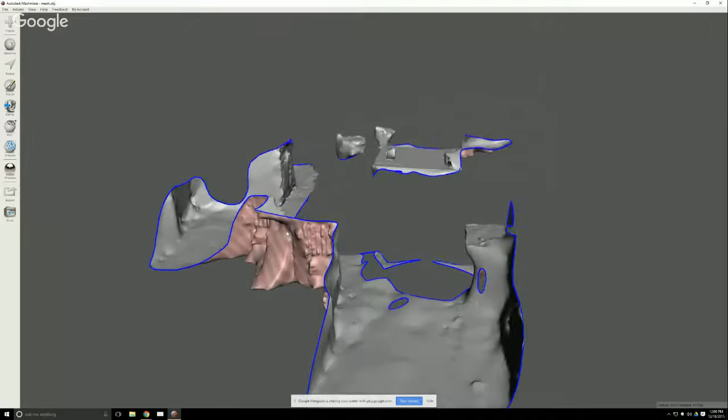So let me share my screen here. You'll see the webinar going into infinity, but I will bring up Meshmixer right here. And there we go. So this is Meshmixer. I'm going to go in and import a mesh. I think I used this one in the Udemy videos, but this is a scan I created with 123D Catch, which is essentially taking pictures with my cell phone, or any camera you happen to have, that will create a 3D model.

The mesh gets imported without any shaders right here, but if I click on shaders and drag the little world icon on, we'll see what this is. This is actually my kitchen. Chairs and tables. There's a window out over here looking outside, all this stuff. But what I wanted to get was right here in the center, which is a rock. So this is a rock from my garden that I wanted to scan.

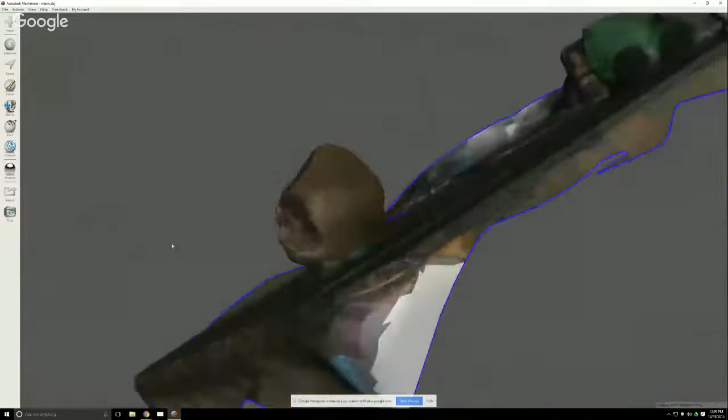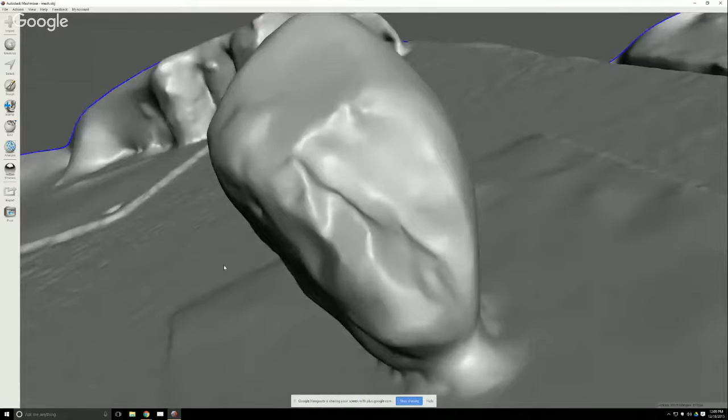If I turn on wireframe by hitting W, you can see that it's okay. It's actually not as detailed as you might think. If I turn the shader off to a normal shader, you can see that there's not that much detail on the rock. Certainly more than I could have created by myself, but not a terrible amount of detail. But it's all relative. If you wanted to model this rock by hand, it would be super difficult to get it accurate. So this is still a really good start.

If I hit W again and go back into wireframe, you can see that 123D Catch doesn't put a whole lot of triangles. Let me select some up here. It doesn't put a whole lot of detail in large flat areas, so up here the triangles are pretty large. But in places where there's a lot of curvature, like down here, there are a lot smaller triangles. The software says there's a little bit more detail there, so it spends more time making it accurate in these areas. That's why there's a difference.

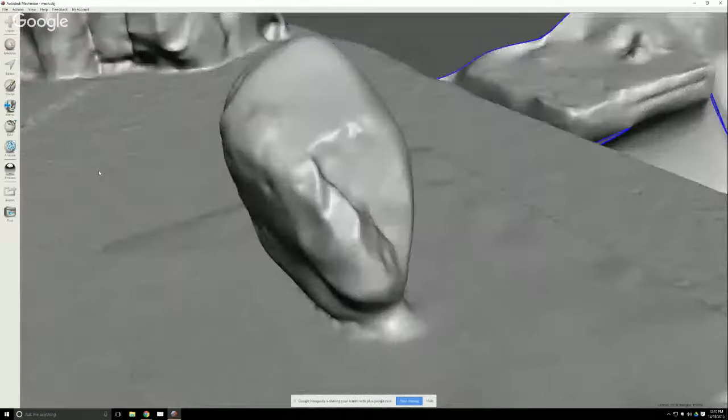Now, if we turn the shader back on by dragging the little world onto it, you can see that it looks really detailed with the color turned on. But that is kind of deceiving, because you might think there's a lot of information right here in the center where this little divot is, but if I turn wireframe on, there's a little bit of detail there, but not a whole lot, especially down here where you get all these patterns in the color, but the actual mesh doesn't have a lot of detail.

With that said, if you were to go 3D print this in color from an online service bureau, a lot of these colors would come out. They wouldn't be represented by geometry underneath, but the colors would come out. So that is a kind of a cool thing.

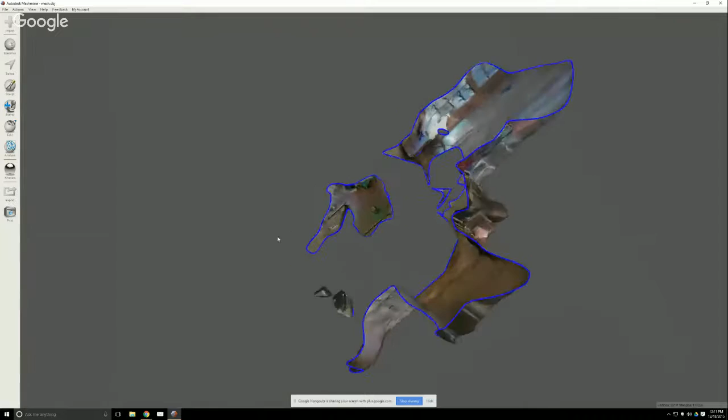So a basic scan cleanup - if I zoom out, you know, this is everything that was captured by 123D Catch, a lot of stuff that I don't want. So this is a very good example where I was able to go completely around an object. This is like a little cutting mat that I photographed this on. I was able to go completely around.

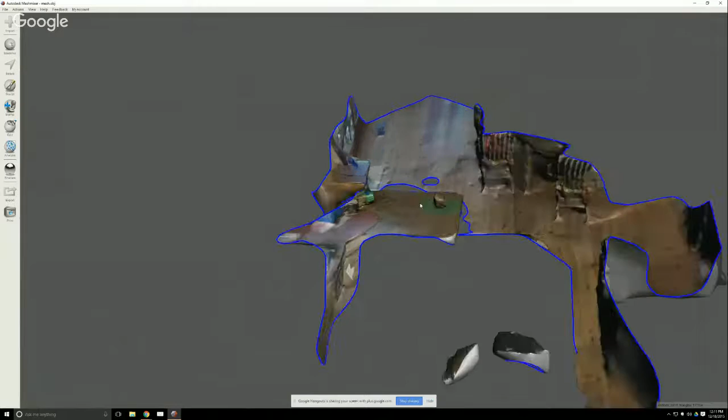Oh, and by the way, here's something that you use a lot. You know, if I try to zoom in on this rock, I'm not really zooming in on the right place. So then I might try to pan it over. That's great, and I zoom in. But when I start turning, I'm turning not at the right aspect.

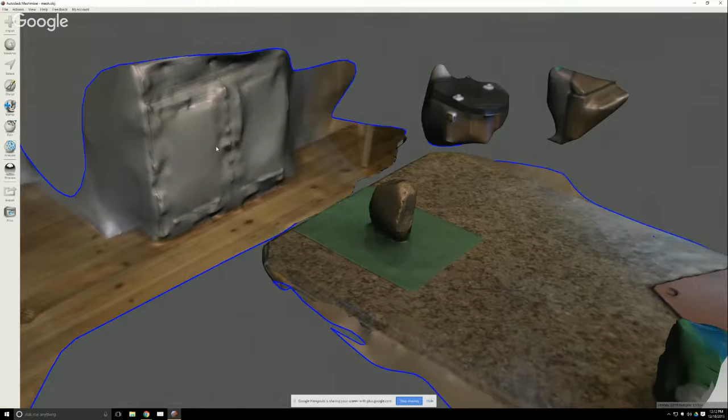So a shortcut that I use all the time is the C key, C for center. Wherever your mouse is, if you press the C key, your camera will be centered on that. So I'm centered on that cabinet here. If I happen to have the rock way at the corner of my screen and I press C, the rock now jumps to the center of the screen. So you end up using that a lot.

Even if you zoom in like this and you say, oh, I want to center on this area down here, you don't really have to move the mouse and go like this, because you're not really rotating around this divot right here, you're rotating around somewhere else. So you hit the C key and now you're rotating around that divot. It's terribly, terribly useful. Okay.

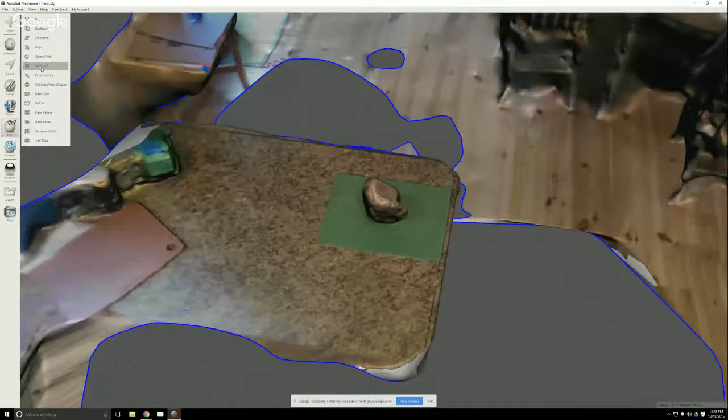So let me go back and say you really want to just get rid of a lot of stuff when you create a scan. The easiest way to do that is to go to Edit to Plane Cut. Plane Cut creates a plane that's going to be cut on, and you can manipulate that plane with these little handlebars here.

Let me zoom in a little bit. These little handlebars here rotate it in different ways like this, or move it with the arrows. Move it like this. And you can see with the arrows, when it gets shaded or ghostly, that's what's going to get cut away and the actual model stays.

But what's kind of easier for something like this, is even if you see the rock like this, you can just drag a line. So I'm going to click and drag a line right at the bottom of this rock. Boop - and it creates a plane right here.

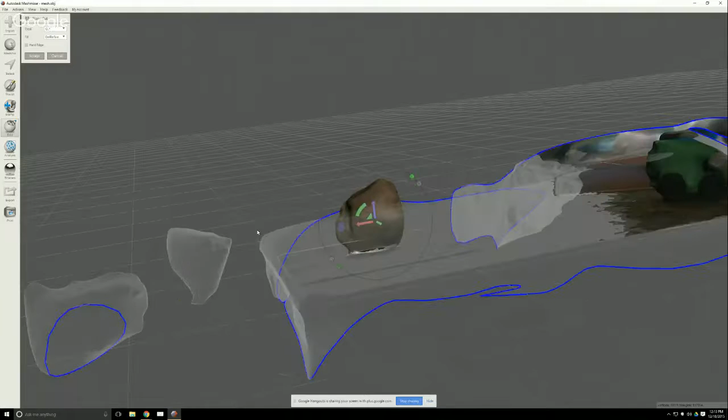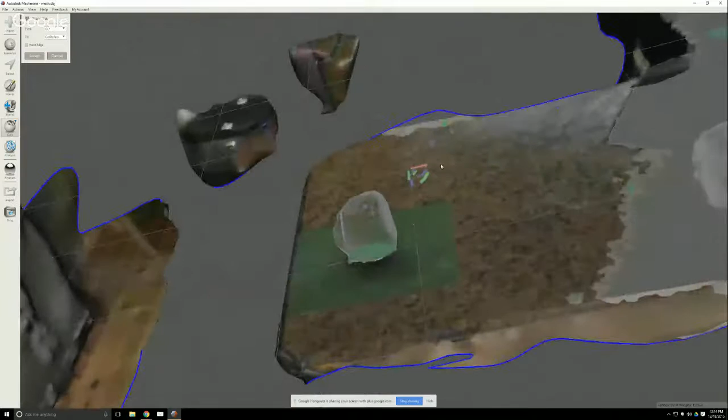Now, sometimes it might show up like this, and you say, hey, I dragged a line and it's not cutting the right thing, right? It's going to keep the counter and get rid of the rock. This little blue arrow pointing upwards changes the orientation, upwards and downwards. So now if I click on this, the rock gets deleted. If I click on this, everything else gets deleted. I'm going to click Accept.

So great, but that cut also left some other things here, right? It was great for the rock, but not perfect for all of the rest of the stuff. So that's actually very easily fixed.

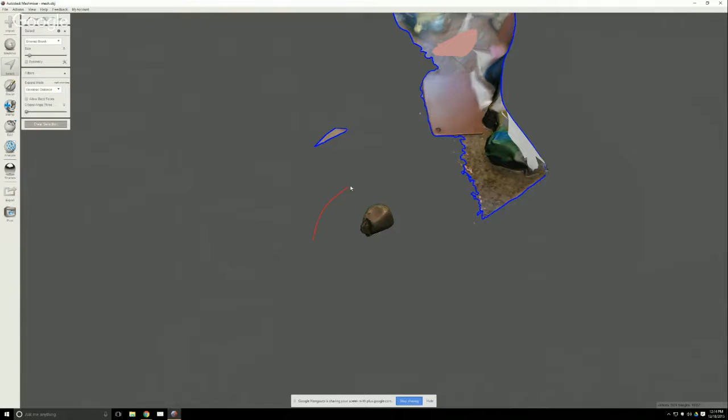I'm going to go up here to Select on the left-hand side, and this allows me to select - you see I'm selecting little things like this, but there's actually an easier way. I'm going to select and just kind of draw a line around the thing that I want. In this case it's selected it, but I don't want that to be selected, I want everything else because I want to delete it. So I can go up here to Modify, to Invert, or just press the I key.

And now everything except the rock is selected, and I can hit the Delete key. Boop - so now I only have the rock left. And the plane cut has created a nice cut on the bottom. And I could 3D print this.

Now, the question that was asked online was, how do I hollow things? Well, if you upload this to Sculpteo or Shapeways - specifically Sculpteo, I know this, but I think Shapeways does this as well - you can add in holes and it will hollow the model in the online program. You don't have to do it in Meshmixer. And the reason why you would want to hollow it is otherwise you would have to pay for all of that material that's inside that rock.

Sometimes that can get really expensive when you just want the outside. You just want it to look like a rock and not feel like one. Online tools like Sculpteo and Shapeways have options that say hollow and place holes in to make it hollow. But if you want to hollow this yourself, here is how you would do it.

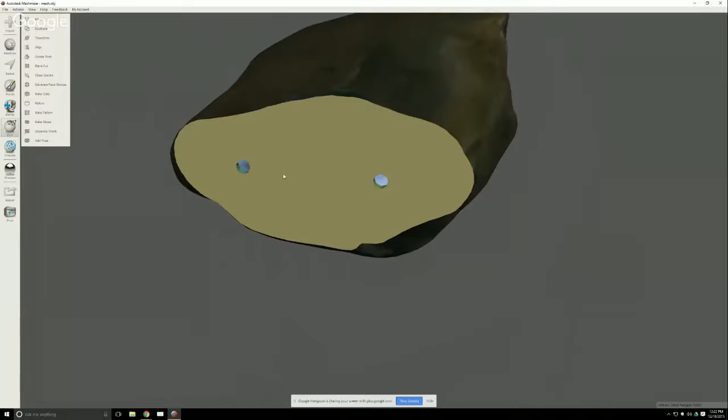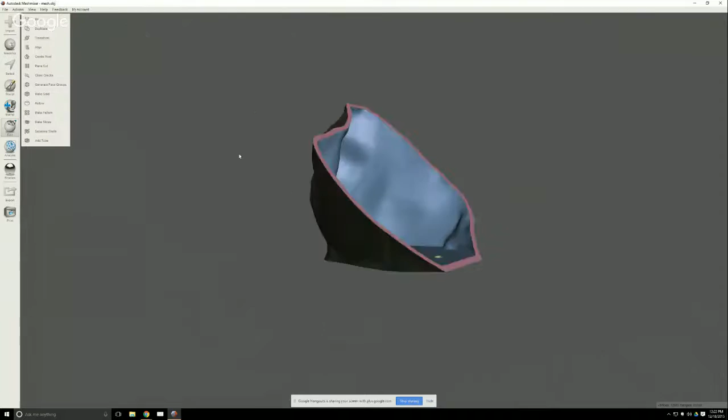Meshmixer will think about it for a second, and now we have a rock with some holes inside. If we click on this, we can see that there's stuff going on inside. I'm going to do something very egregious here and do another plane cut right across the top side of this, and accept it. You can see that we created 2 holes down here to an empty hollow, and that's what you would do.

You would upload, if I undo that, you would upload this into Shapeways or whatever and get it successfully printed. So that is how to do some scan cleanup.

Now people wanted to know about some measurement tools. There's some pretty cool things inside of Meshmixer under Analysis, under Measure, right here. So there's Type and Direction. Direction is absolute X, Y, Z. I don't tend to use this. I tend to use just the Normal, which is just based on the model itself.

This first one is interior thickness. If I click on this, let me turn off the shader for a moment and zoom in here. You can see there's a little red dot following me. As I click and hold my mouse button down, you can see on the right hand of the screen, 3.08449, and as I click around, this is 2.99863. So it's showing that the thickness from this skin to the next skin on the inside is pretty consistent with the thickness of the skin that I just created.

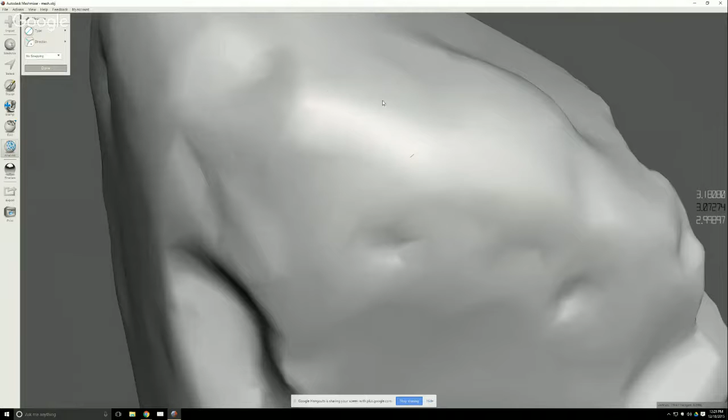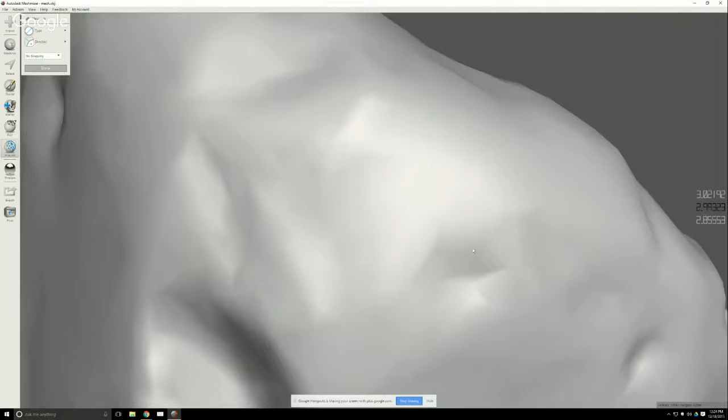This number right here at the top is the maximum number since I started dragging, and this is the minimum number since I started dragging. If you let go of your mouse and click again, those numbers will reset, but it helps to show you that in this area, let's go right here. If I click and drag and just scribble around and move the rock here, that area, based on where I scribbled around, variates between 3.02 millimeters and 2.85 millimeters. And right in the last place I clicked was 2.99. So it kind of helps you to determine thickness there.

A lot of other different measurement tools you can do that are really kind of awesome, actually, in different places all the way through your model, 145 millimeters, things like that.

Some very cool tools are distance. So it may not look like I'm doing anything, but if I hold down Control and click on one place, or Command on a Mac right here, and now I click on another place, I can get the distance between those 2 points through the model, which is pretty nice. So if I wanted to start my ray over here, I would have to hold down Command on the Mac or Control on the PC, click here, and now I can start dragging from other places. So that's some cool measurement tools there.

Let me go back here. So that's some questions on the measurement tools and scan cleanup. So hopefully that helped answer those survey questions there.

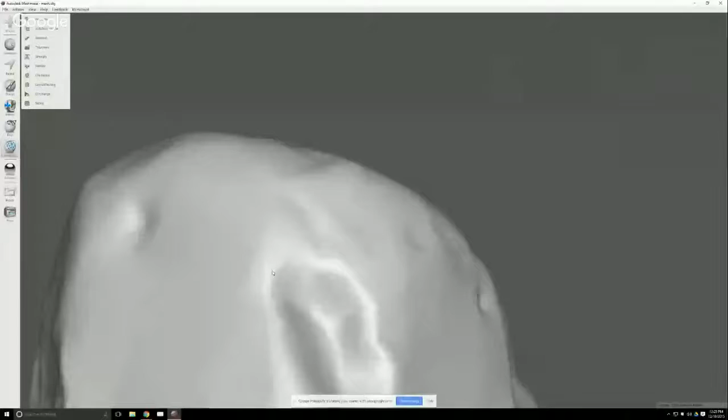So let me go back and share my screen here. Okay, so what I'm going to do is go back on my desktop here and import this. So this is just a plate that I created. It's not flat on the bottom, kind of bumpy on top. So that's great. Let's import another plate and append it. And oftentimes what people see is that things come in, especially with scans, not aligned. Let me move the browser over here. And the question is, how do we align these things together?

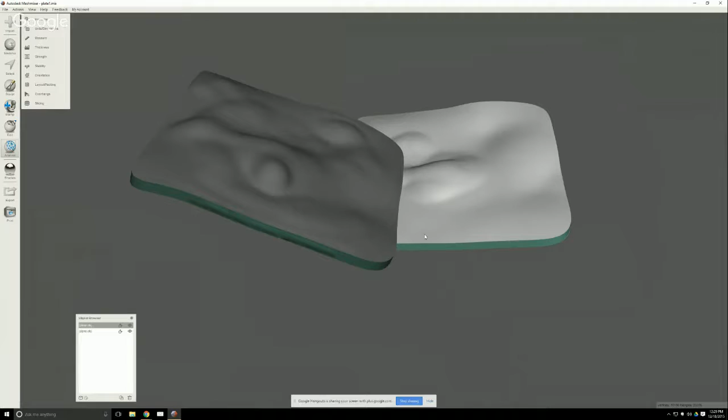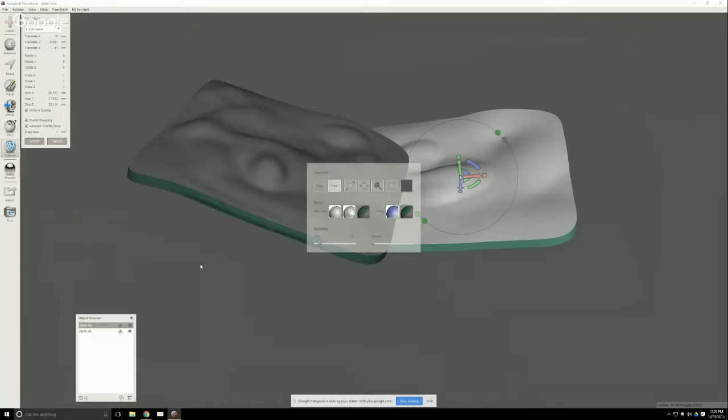Now, certainly you can do it by eye, right? A kind of more official way is hold down spacebar and turn on snapping. The little tip here is anything that is shaded is the thing that is enabled. So right now we want to make free not enabled. We don't want a free camera, and we do want to enable snapping like that. So what this does is it clicks into the different views, like click, now I'm looking directly from the top. If I click from the side, I see that this one on the left seems to be okay, pretty aligned like this, but this one isn't, right?

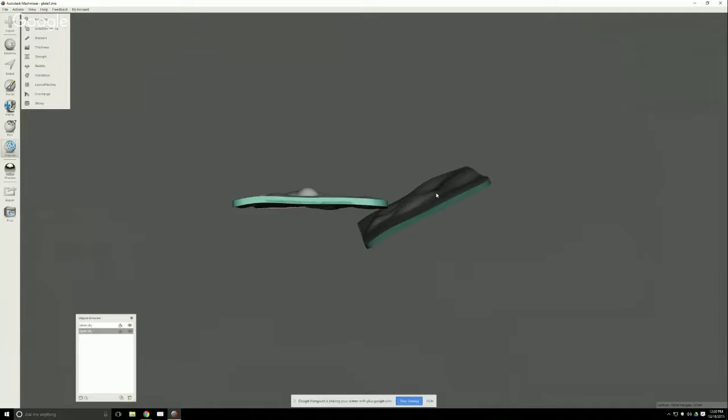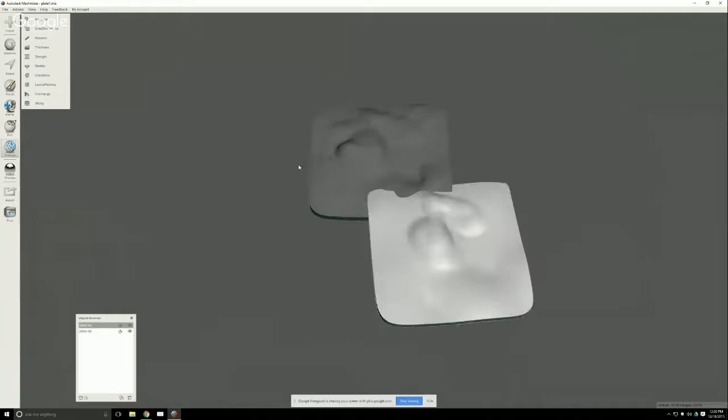So I'm going to click on this, hit T for transform, and try to align it as best I can, and click accept. Now we go and let it snap to the other orientation. Again, hit T and try to align it as best we can there. And then we're going to go upwards and snap like this and try to align as best we can here. And then hope that when we put it on here, it kind of matches.

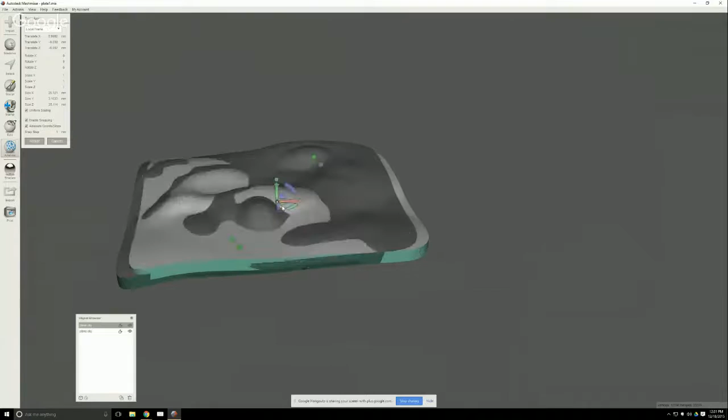But it didn't, right? So now we have to go back, move down, and we can see that these plates are really not aligned yet, right? So it creates a lot more work, and then you don't really know if they're that aligned. Still, it's not. So here's a different kind of way of doing this. So the trick for this is usually the things that you want to align have some common features on them.

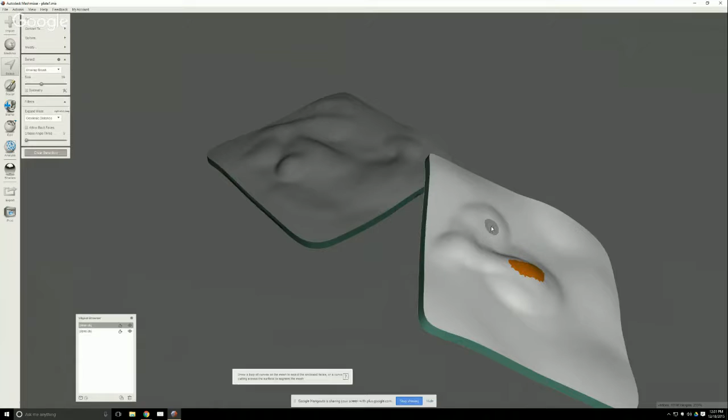So in this, let me do some selections. Make my select a little bit bigger here. I can see that this bump right here is common over here, maybe something right here, and maybe something right here. There's a whole bunch of other stuff going on this plate that's not aligned or not on the other plate, but those are something that is somewhat similar from plate to plate.

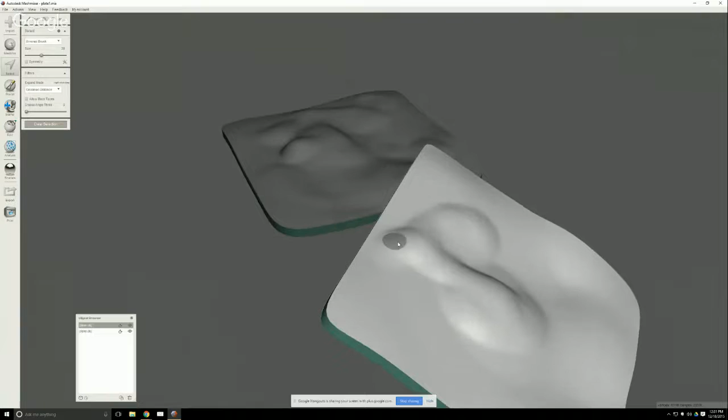So what I'm going to do is do this a little bit more methodically. I'm going to go in and say this ridge right here is something I can find on the other one. This is something I can find on the other one. And something like this I'm going to find on the other one. So I've created 3 selections. And I can turn the snapping off like this.

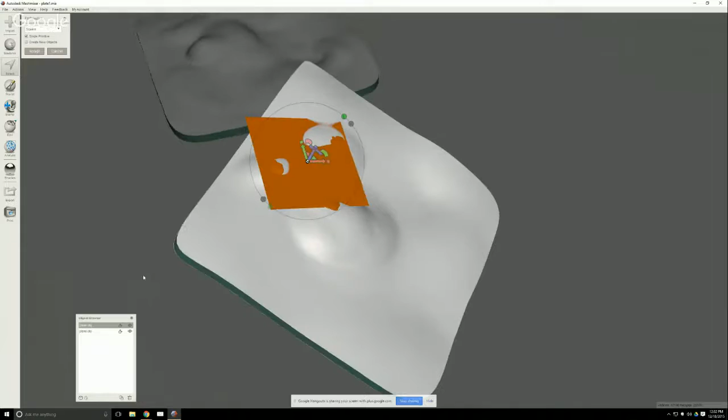And now with these 3, I'm going to go in to Edit, Fit Primitive. This is set to square right now, so I'm creating some little squares. But what I want to click is Single Primitive. Boom. So what it does is it averages all 3 of those selections and puts a flat square in between those 3, connecting those 3 places. So I click accept. So now we have this very, very flat square in here.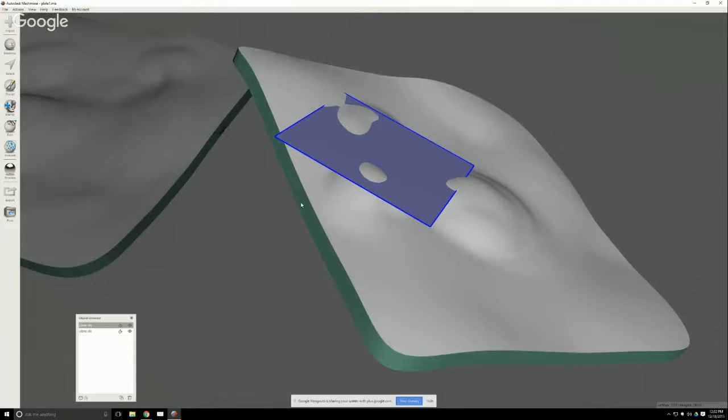So what we're going to do now is go to Edit, Align. And I'm going to make sure that I have surface point and then Y up. And you see that the thing went somewhere. I'm going to click on this plate, and you can see that the flat areas of this plate are not causing the object to flip. And you can see that the plate is under here. You can also say flip like this if you want the plate to be like this.

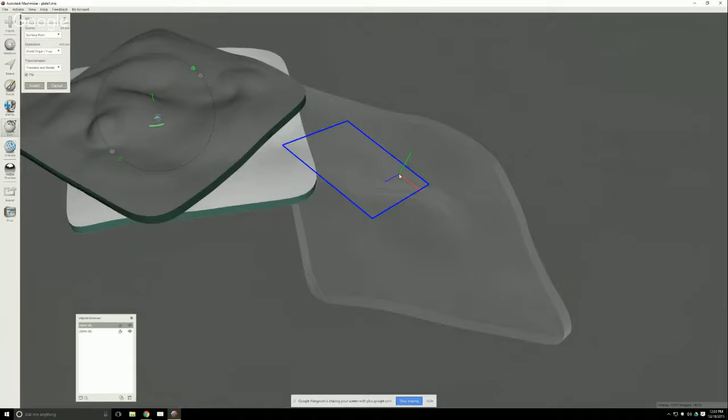But see, once I get over some little bumps that were poking up through that plate, that's not good. So I just try to choose one of the flat parts of that plate and click accept. So now let me move this guy away. So now this plate right here is aligned to the Y up. So this is facing directly upwards.

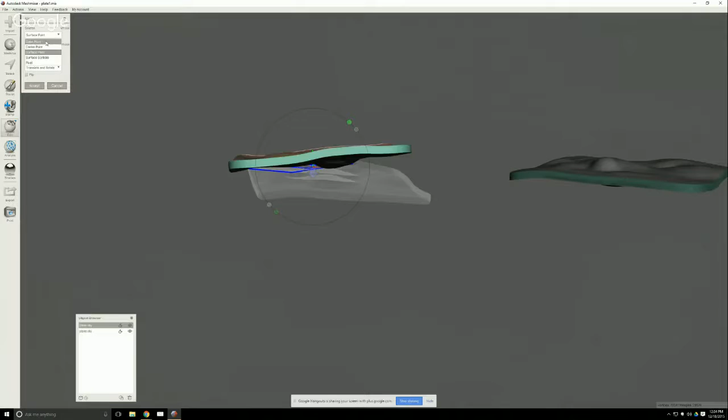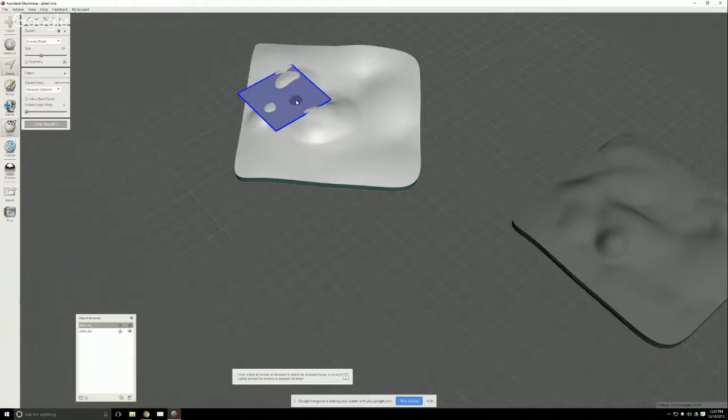I'm going to make sure this one is selected and do align again. And instead of surface point, I'm just going to say base point and just translate. So I don't want it to rotate. And so that now put this facing upwards and the base point, if we view grid, right on the grid like that. So that's great. At this point, for ease, since it's its own face group, I can double click on it and hit delete. So I've gotten rid of that plate.

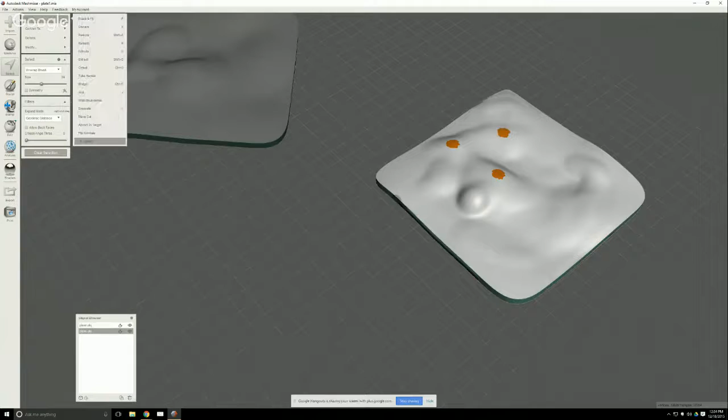So now I'm going to go over to the other object right here and try to select the same places. Now this won't be perfect, but it was generally right about here, generally around here, and generally right here. I'm going to do the same thing. Edit, Fit Primitive, Single Primitive. So we created a plate here. Click accept and Edit, Align.

Thomas just actually wrote in there. He says he has to sleep. It's 4 a.m. in his time. So I super appreciate Thomas's diligence for coming to this webinar. Thank you so much, Thomas, and have a good sleep.

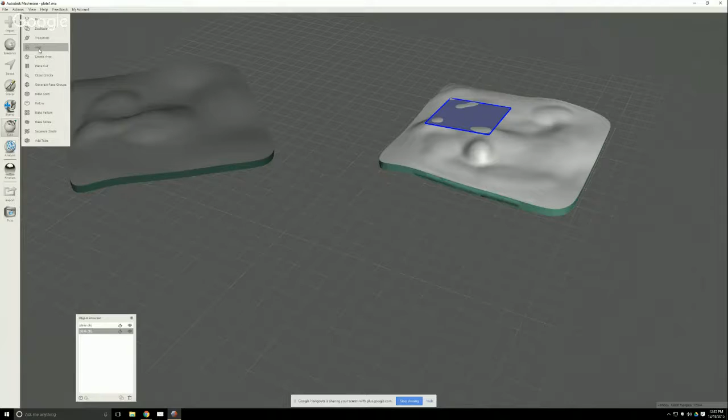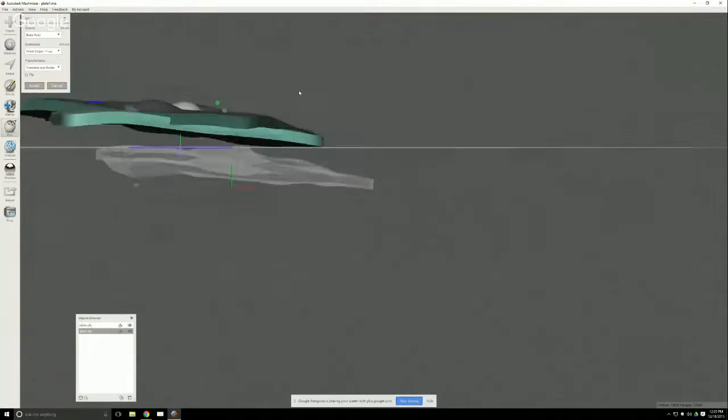So I'm going to align again with the surface point selected and flip again. And see, as I click on this, there's some alignment happening. So that's pretty good. And then align again and switch surface to base point. So these two planes are essentially at the same level. Now, assuming that I was pretty good at selecting those two places, I'm going to select that and delete it.

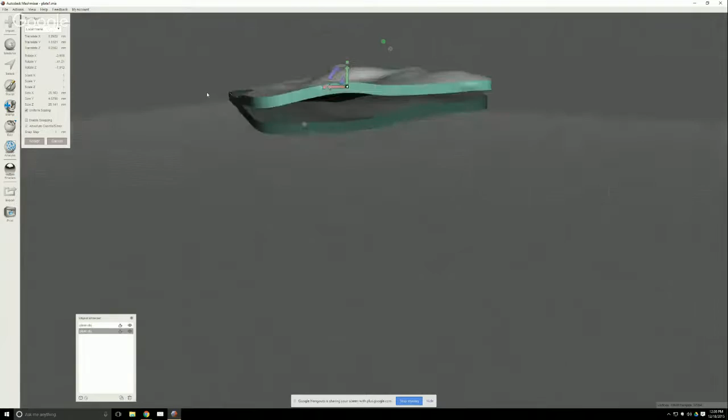So now all I will need to do is use the transform tool in one plane, right? This green plane right here, to go and move it. And you can see I was a little bit off in my selections right here, but I only have to use these easier alignment tools of the arrows to get it where I need to go. It looks like I was quite a bit off on these, but you can see that it's getting a lot closer than if I were to try to eyeball it.

So you can use these kind of helper planes to see the differences between these, and these plates were significantly changed right here. But it's actually a pretty cool technique to use those helper planes.

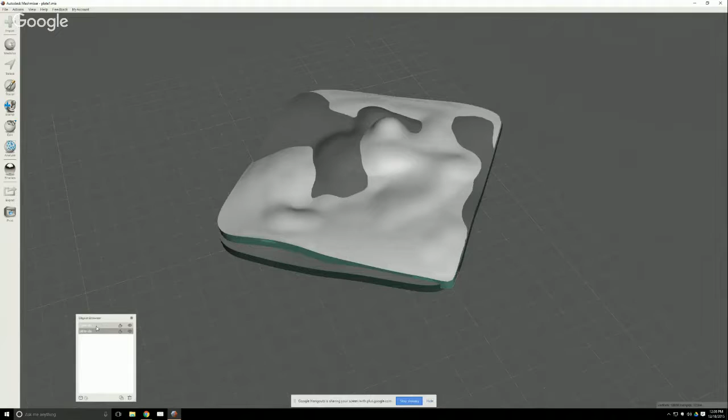And then once you have them aligned, you can use some of the measurement tools by selecting both of these and going into analysis here and doing things like deviation, where you can see how each one deviates from the other. And if you actually click on this bubble, you can select where it deviates, which is pretty cool. And it does depend on which order you click.

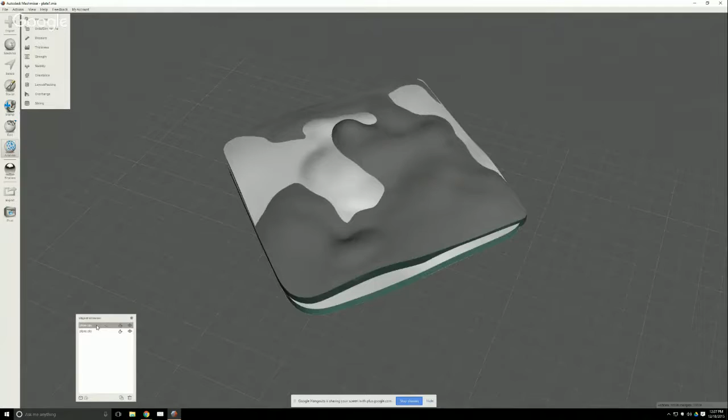If I click on this first object here, and then the second, and do deviation, it'll show the deviation between the first and the second in that order. Or if I click on the second one first and then the first one second and do deviation, it shows the opposite. So it does matter the order in which you click.

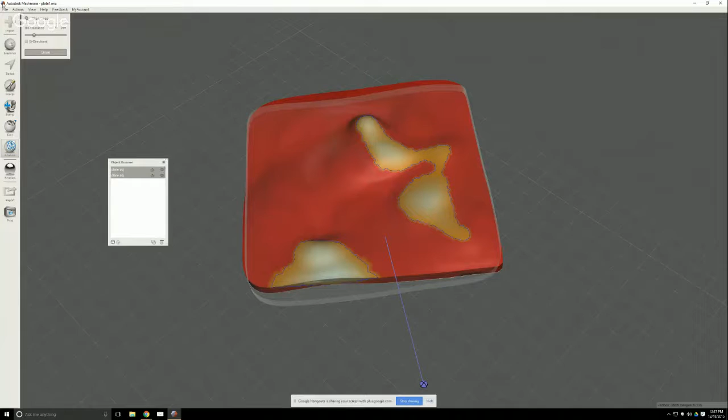And there are other tools too. The clearance tools, how much clearance you have between the two, that type of thing. A lot of cool things there. So that's how to do some kind of alignment type things inside of Meshmixer. Let me go back here so you can see me.

So using that helper plane is very nice, because when you use the fit primitive command, it creates a plane with its own face group. So it's very easy to go and select that plane. It doesn't Boolean it in. It doesn't mess up your mesh. It just kind of passes through your mesh, but it's tied to it. So as that plane rotates, your other object rotates as well.

As I said, it's actually quite an often request to do precise alignments. That will get better, I am absolutely sure of it. That's one way of doing it now, and it will get better in the future. Now, the last thing that I wanted to talk about of the things that I sent out in the email was not really with Meshmixer, but it does interface with it.

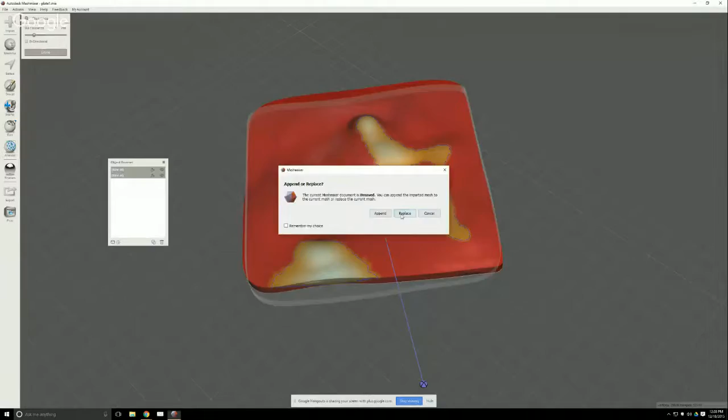If I go back into Meshmixer and just bring in the bunny, replace and fix the bunny here with the inspector like this. You know that Meshmixer creates overhangs. So we go here to analysis, generate supports, right? So very, very blocky supports.

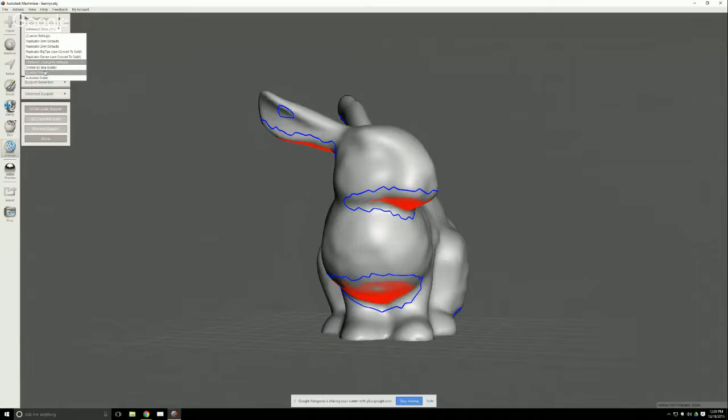These are supports for an FDM printer called an Ultimaker. These are supports for some sort of SLA printer, so a resin printer. Since these print upside down, let me do a free camera. You could essentially see that this prints upside down like this. So there's a huge amount of platform right here, and then it prints downwards like that. But it creates support structures.

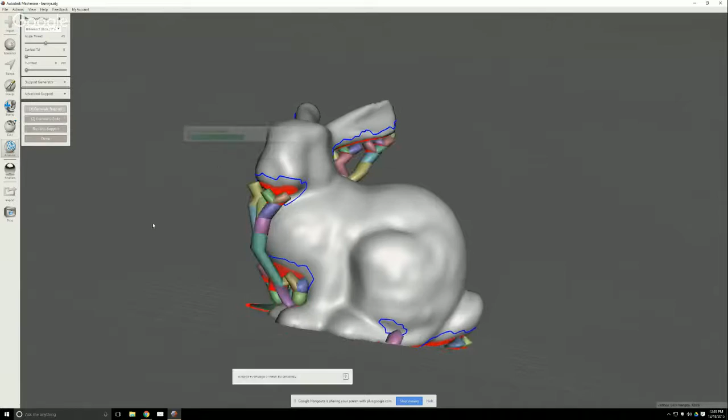And let me switch this back to Ultimaker, remove, generate. And when you're done with creating supports, you remember that you can edit supports inside of here. You go to convert to solid. You can create a new object or replace existing. I'll just replace existing. And now you have some models. If you hit wireframe, you can see that these are 3D models just like the bunny is.

And before I go into Print Studio, I want to tell you one other thing that I thought was really, really awesome. I'm going to go back out, back into overhangs. Now, a lot of people say, I want to generate support. Great, this created support, but I don't like this support, right? So they'll say, I want this support not to be attached to the foot of the bunny. I want it to be on the ground. Why isn't it doing that?

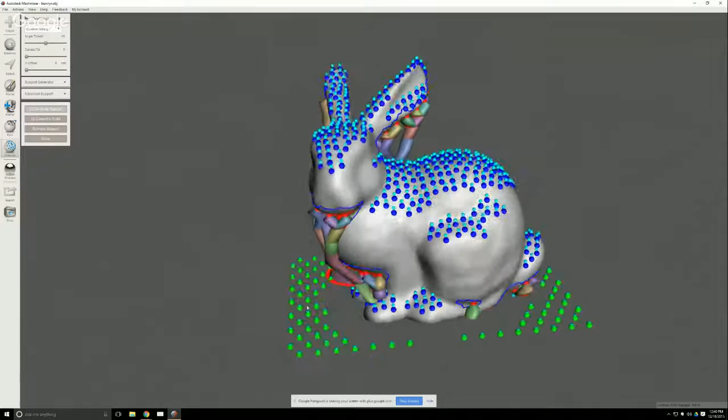Well, there's a couple of different things you can do that are completely hidden features inside of Meshmixer. If you press the D key, D as in David, or D for display, or D for debug, you get some really awesome effects. So this is kind of a hidden Meshmixer tool that shows you all of the places that Meshmixer thinks are valid for creating automated supports. So if there was some object up here, the entire back of the bunny would be fine for creating automated supports. But you see that down here, Meshmixer doesn't like this for some reason.

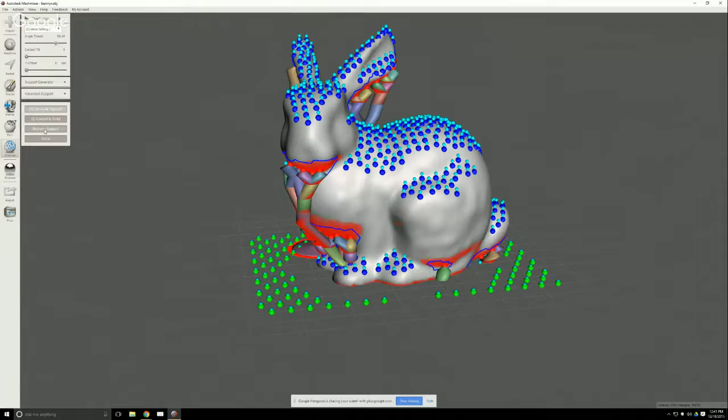If you change the settings, the automated support settings also change. You can see that when we create support, it will create them from these little blue dots right here, downwards, right? And the red is overhang dots, going down wherever they need to go.

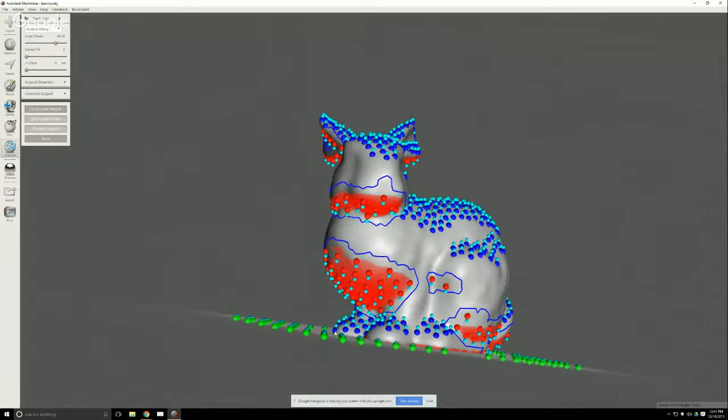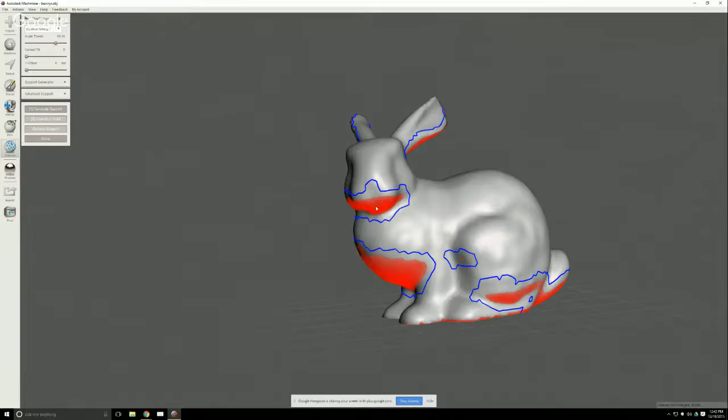Now, a lot of people say, okay, this is great. This helps me understand where Meshmixer wants to create support structures. But what if I want to create a support structure and Meshmixer doesn't let me, right? So right now I can drag down. There's something about this support that Meshmixer doesn't like. If I just click the mouse, I can start creating supports.

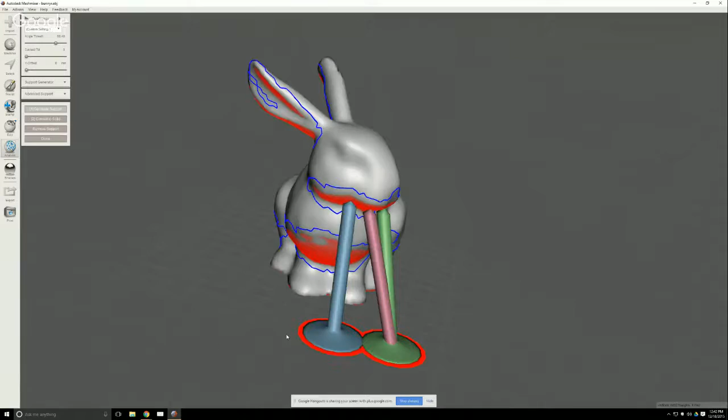But if I click here, you see Meshmixer doesn't let me. If I drag it down, Meshmixer doesn't let me for some reason. It violates one of the rules up here. So what if I want to say, I just want to create a support down, right? So the way that I did that is I held down the Shift button. So holding down the Shift button says, don't listen to any rules, just create the support wherever you as the user tell it. So if I go like this, I'm going to create a support.

But you have to be very careful when you use this, because you can see that that support carves through the bunny. So I could create a support like that that literally carves through the bunny. So you have to be very careful when you use the Shift key, because you can create supports that there's no way they could exist in real life.

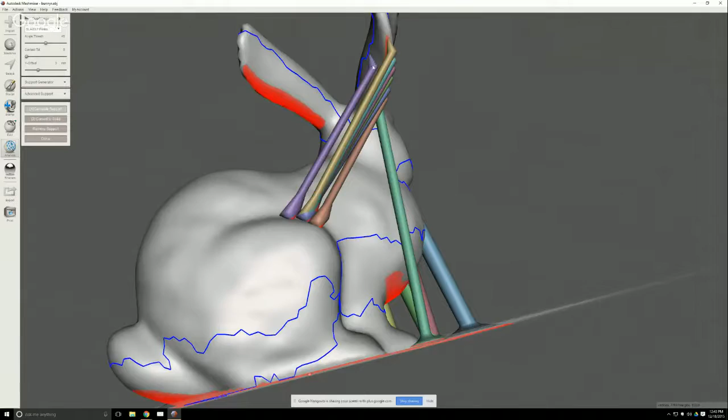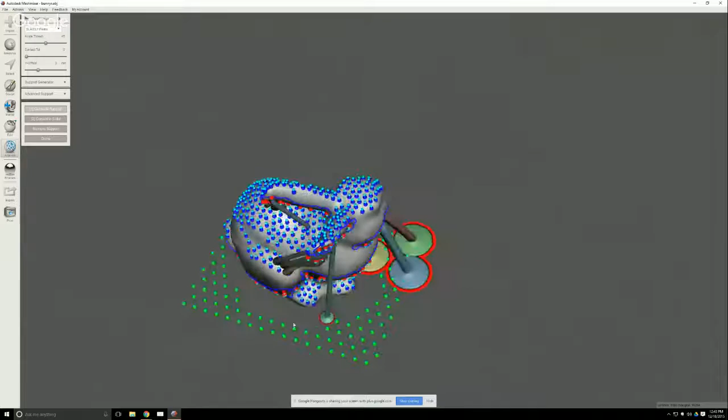So like that one's fine. I'm just clicking, clicking, clicking. Great, it's all working. But if I know that I want a support somewhere else, like right here, for example, I could try to kind of fudge it and have it go down, or I just hold down Shift and it will create it. But remember, it can mess up your model. So that Shift key is really, really cool. And the D key is kind of useful too, to show you where Meshmixer thinks that automated supports can go. So some people do ask about that.

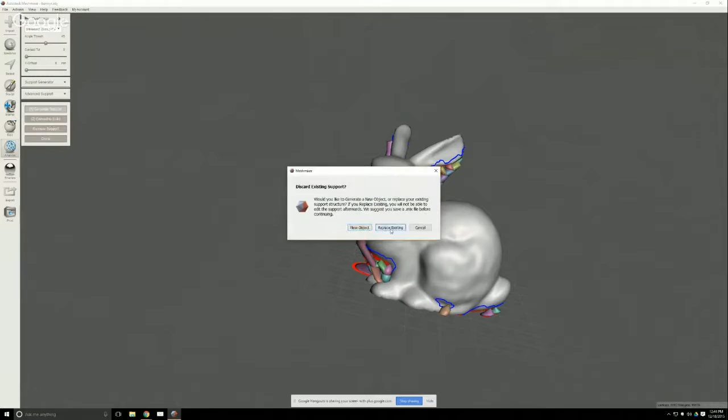And so people also say, great, I'm going to remove all of these. Let me go back into Meshmixer, generate support, turn off that. Convert to solid. So this is what I would export for printing. But then, sometimes, the printer wants more supports in a certain place or whatever. So this is great, but sometimes you just maybe want a little bit more, or your slicer might tell you something more. So let me go out.

Let me export this as bunny.stl on my desktop. My desktop right here, bunny, and bring up a slicer that I have called Simplify 3D. Right. So the bunny comes in here. I can say customize support structures. I believe this is at the same angle, and generate supports. And you see my slicer actually has some more supports that it suggests over and above what Meshmixer wanted. So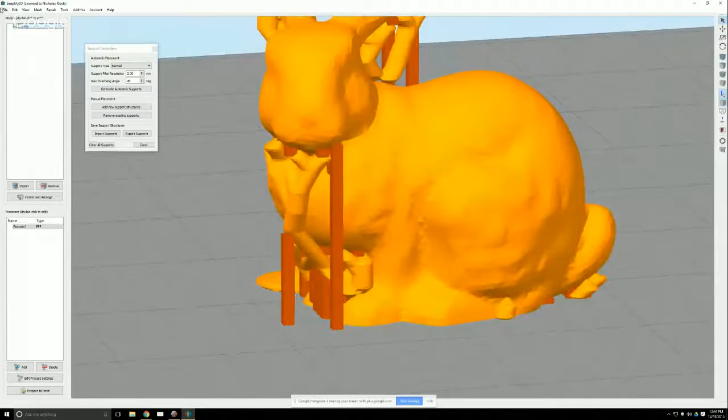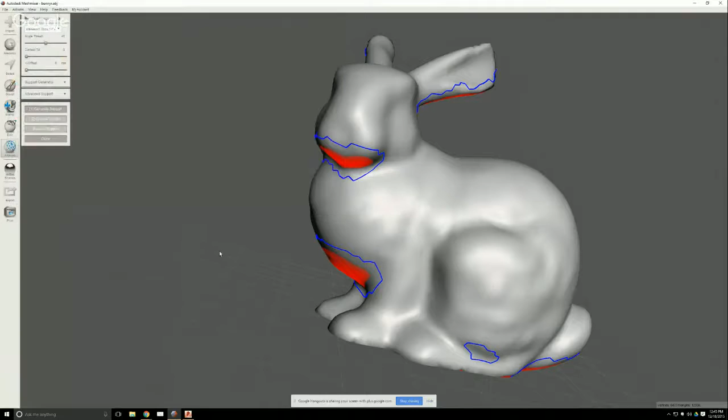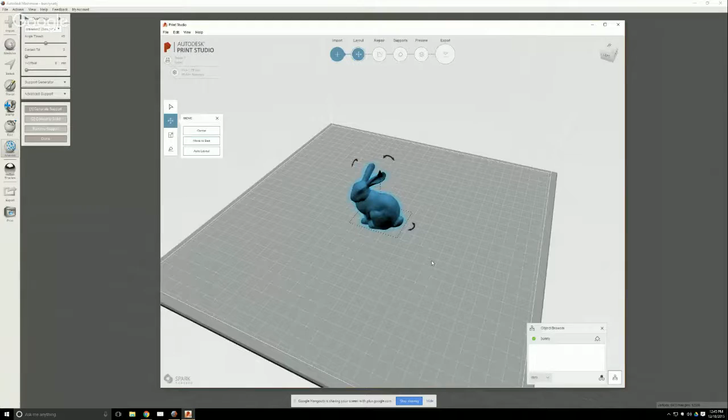Autodesk also realizes that people want to actually print. So I'm going to bring up the new software from Autodesk called Print Studio. This is Autodesk Print Studio, and you'll see some really interesting things. So let me go back and just export the bunny just by itself. So now we have here, let me make Print Studio a little bit larger. So I'm going to import something. I'm going to go to the bunny and bring the bunny in. So this is essentially a slicer. This is the software they use for Autodesk's Ember resin printer, but it can also create toolpaths for FDM printers.

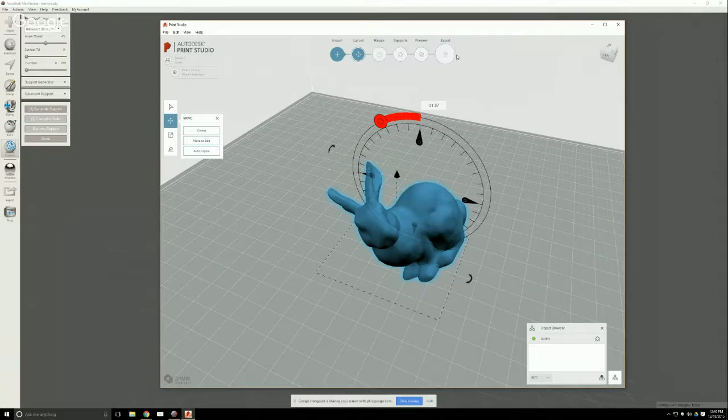So this is the bed of my printer. This is a Type A Machines Series 1 printer, an FDM printer, and here is the bunny on it, right? So I can say rotate it on the print bed, maybe move it if I want to. And this is kind of a progression up here: import, layout, repair, supports, preview, and export. So right here we say move. I'm going to center it on the bed. I can move it to a bed. I can say auto layout and maybe see what it thinks. It thinks, not too much.

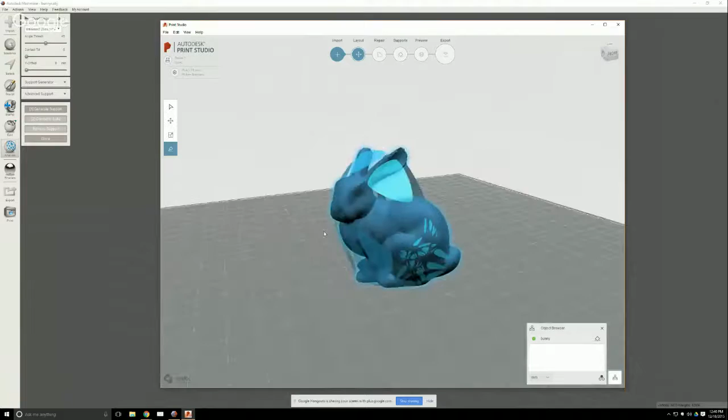I can do some scaling of it if I want, make it a little bit bigger. I can lay it flat. So it's trying to figure out ways of laying it flat. So this is kind of nice. These look like little guitar picks; you can click on one of these and it lets you orient your model based on some suggestions on which way it should go. So obviously for this bunny, probably the best one is one of these bottom ones. So I'm going to click on that and it automatically positions it, which is pretty awesome. So now that layout is done, let's go to repair.

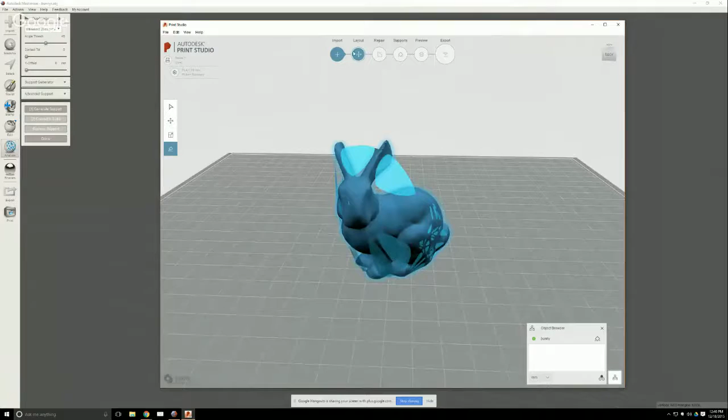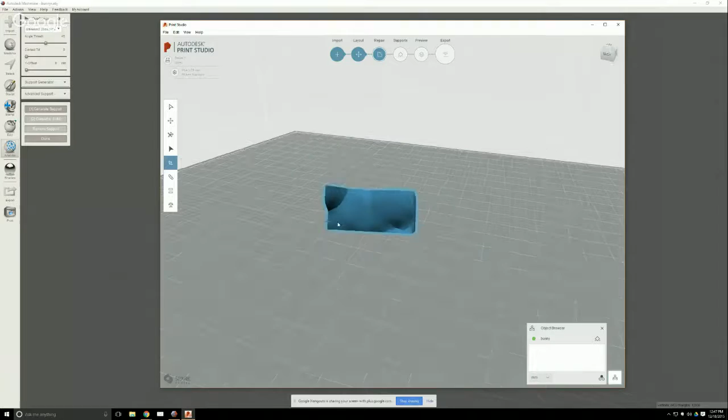We click on repair and it has said no problems. But you can do things like selecting regions on the bunny if you want to delete them and invert them, separate them. You can crop areas like that, pretty quick. I'm going to undo that. Patch holes. If there were holes in the bunny, you could fix that. Lots of different things. Plane cut, plane cut the bunny like that. Balance, just to make sure that your model won't fall over if it's unbalanced, that type of thing. But this has no problems, so I'm going to go to supports.

So auto supports, I'm going to say optimize rotation. It thinks that the best rotation for supports is this. So it's just going to create a little bit of supports down here and print the rest of the bunny. I'm not going to do that. So I'm going to say auto supports and add supports.

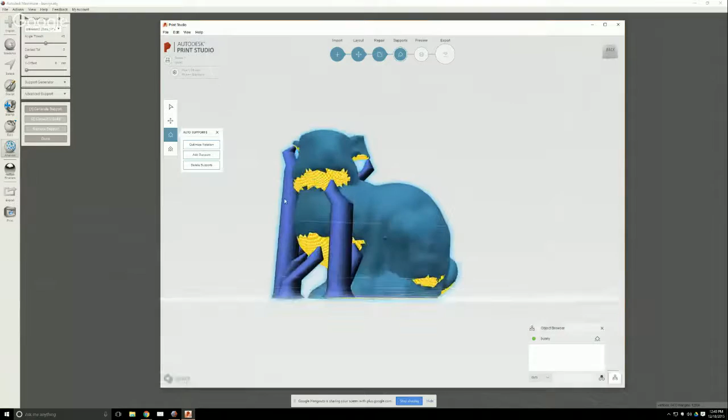They kind of look Meshmixer-y, right, so going up. But the nice thing about this is it creates really, really beefy ones down at the bottom, and then going up. So this is based on Meshmixer and kind of uses the same code base, I would think. Now these supports are really, really beefy, and I'll kind of go into what that means later.

And then you can do manual supports, so you can go in and add different manual ones down to different places. I have this set to be pretty thick supports, which is why I am unable to create too many of them. But you can see that the line is red. If I could get the line to be green, then it would create them. So it's looking like my settings aren't going to work for that. But so this is a green line like that.

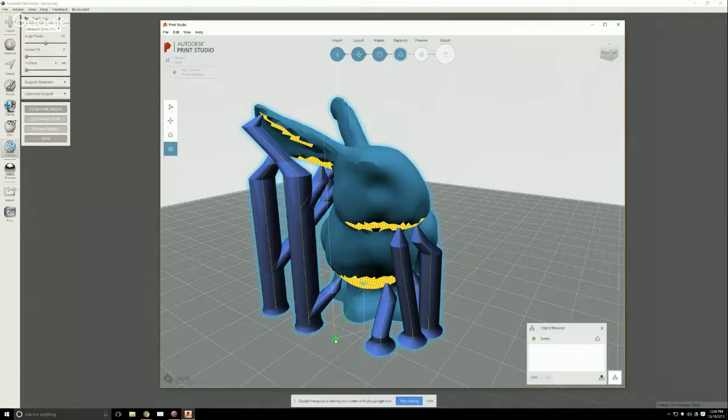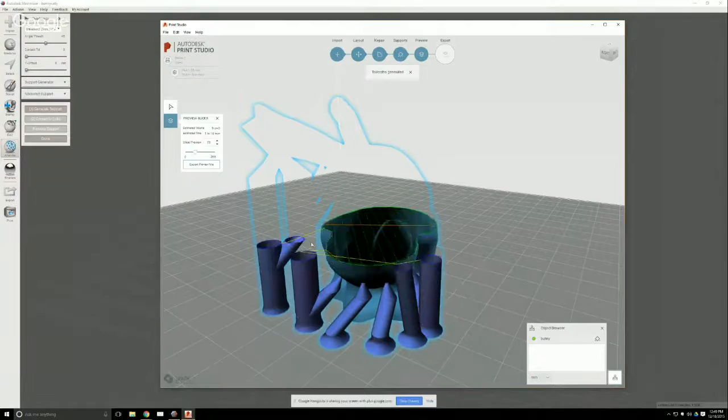Pretty cool. So then preview, what preview is, this actually will create a G-code file for my FDM printer. So toolpaths generated, estimated volume, 9 cubic centimeters, estimated time, 1 hour, 16 minutes. And you can see literally all of the slices that this will be printing. So this is the path of the extruder going up, has a very kind of low amount of infill.

And I'll tell you how to set that later. A low amount of infill, and then it goes up and prints it. So these literally are the toolpaths. So we say export printer file, it will save it as a G-code file. That's pretty awesome. So here's a couple things. Right here, this is set to Series 1. So if you click right under the Autodesk Print Studio, you can say Type A printer.

Right now, my Type A machines is not set up. I have a couple of Type A machines in here, but you just add in your printer's IP address for the Type A machines, and it will automatically configure it. Let me go back to Print Studio here.

The nice thing about this is if my Type A machines were turned on right now, all I would need to do is just click print. It would automatically log into the web interface on the Type A machines, load the G-code file, and start printing. I wouldn't need to do anything. It will actually manage it all from Print Studio, which is pretty neat.

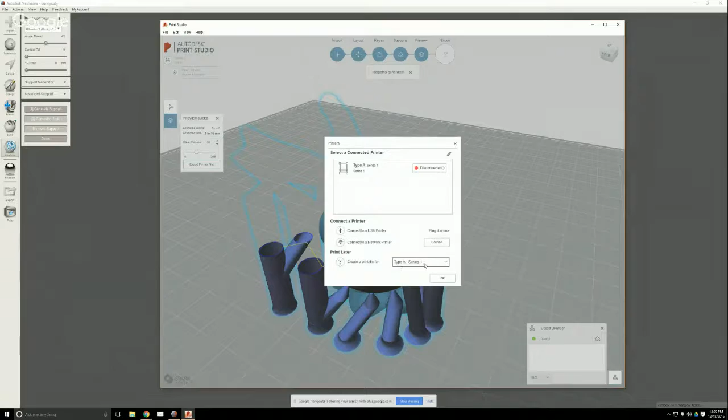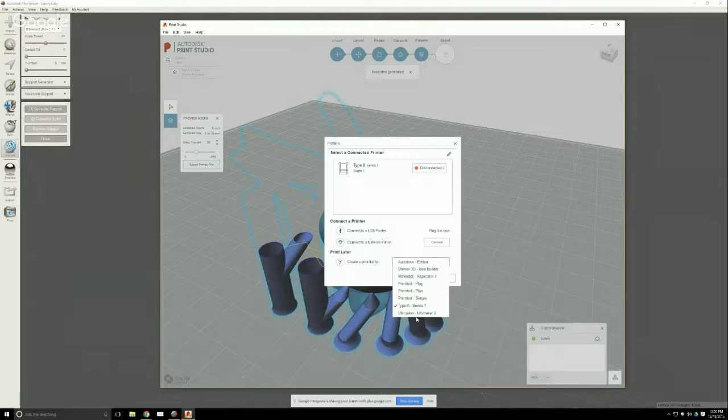Right here, so this is the Series 1, so you can say, create a print file for, there's only a certain number of printers it supports right now. Autodesk Ember, Dremel Idea Builder, MakerBot Rep 2, the 3 different Printrbot models, Type A machines, and Ultimaker. More printers are coming, and it's not too hard to add your printer in, but those are the ones that it supports right now.

Right here is the materials, so PLA 1.75 millimeters. I click on this. Let me expand this screen out. So PLA plus, you have different profiles for different materials, best, standard, draft. So if I want to enable a raft, I click on this. I can say how much infill I have, what infill pattern, and then advanced settings. There are a ton of settings. Support angle tolerance. A lot of these mimic what is said in Meshmixer, which is pretty cool.

Extrusion, extrusion width, all of this stuff. Layer height, how fast you want to print, cooling, all of those things. One thing that I would love to know is where to set the temperature at which to print, which I can't seem to find, but I'm sure it's in there somewhere. But that's something that I submitted a bug on because I can't find the temperature, which is kind of crucial for a lot of stuff.

But here's all of the things, right? So when you go in here, the different layer heights, so 0.2 layer heights, how fast, so cooling, right? You can slow down your print if you're printing very small areas so your print doesn't heat up. Infill angle, that type of thing, skirts and brims to help your print stick to the print bed.

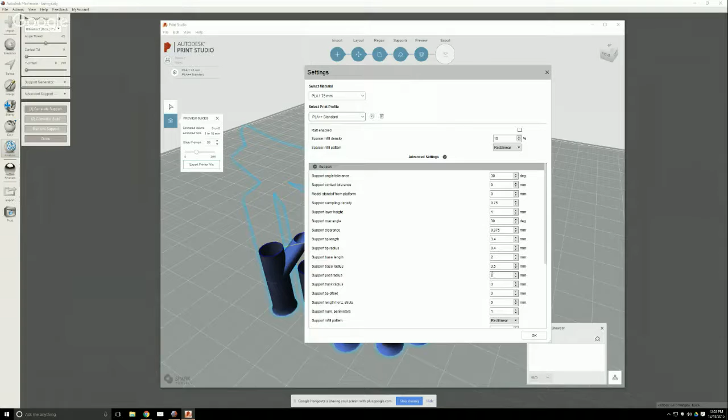You can put in custom start and end G-code, which is very nice. Raft, what bridging you're doing, and if you have to do priming, another thing for dual extruders and all of that. Under support, you can see the support structures I have right here—support post radius of 2 millimeters is good, but maybe not for a model this small, right?

So this is actually a pretty small little bunny if these things are 2 millimeters. But I wanted to show you what—let's see, go back here—I wanted to show you what Print Studio was, because it is a really interesting project that's going on.

For those of you out there who run resin printers, DLP, where it shines a light via projector upwards, like the Ember, this Print Studio software will create those images for DLP projectors. Before Print Studio came out, the only software you would use to create the slices for a DLP resin printer was Creation Workshop, which is free software. But this is actually a very advanced type of thing that will create all of those image slices with the support structures that Autodesk uses for their $5,000 printer—it can be yours also with this free software. So that's really, really cool and very useful.

So a question here, Bill asks a couple.

How do I like the Type A machines versus the MakerBot or Replicator 2s?

I haven't owned a MakerBot because I did my research and a lot of people were having a lot of problems with the hardware on them. If you look at them, there's a lot of plastic components that over time tend to wear out, and people, at least the ones that I know, have complained about the support that MakerBot gives. But then other people I know say that MakerBot gives really good support to its printers.